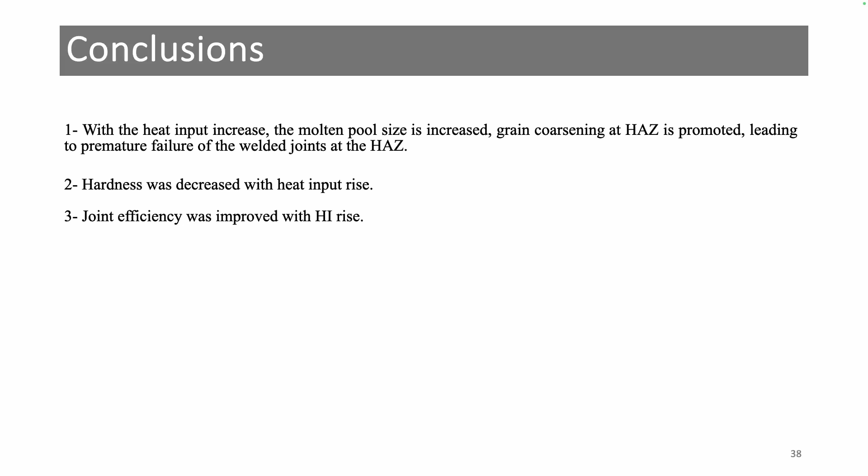Okay, thank you. So we can proceed with your next presentation about indentation behavior of additively manufactured stainless steel welded by tungsten inert gas and laser welding techniques.

Thank you for this introduction. In fact, this work was performed recently. Here we are investigating the TIG welding and laser welding of additively manufactured 316 stainless steel. But what is new for this work? Because already we have many studies on the welding of 316 stainless steel, but it was the orientation of the building itself.

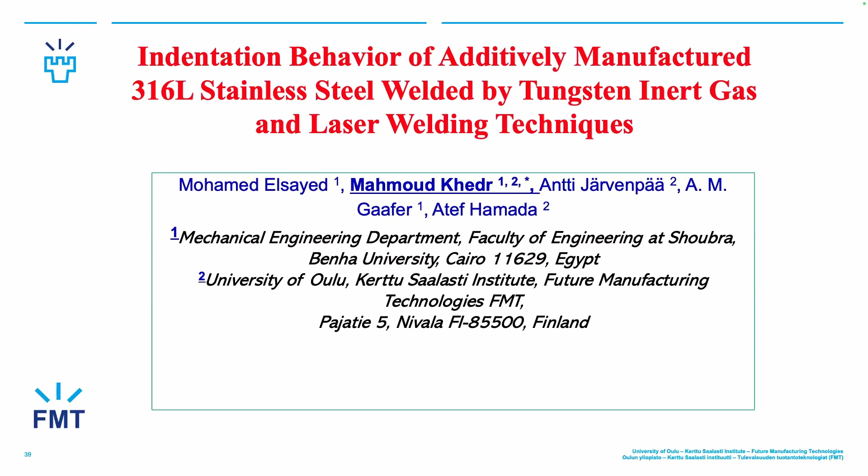So the motivation for that work is that additive manufacturing is already expanding during the past time. And for 316 stainless steel, it's a good corrosion resistant steel with superior mechanical properties with a variety of industrial applications. Therefore, we are investigating 316 stainless steel, and the same also for laser and TIG.

They are widely used and suitable for additive manufacturing, because we know that there are some dimension limitations for additive manufacturing. We are using laser powder bed fusion. Therefore, for the assembly, it would be better to recommend which technique to weld these base metals.

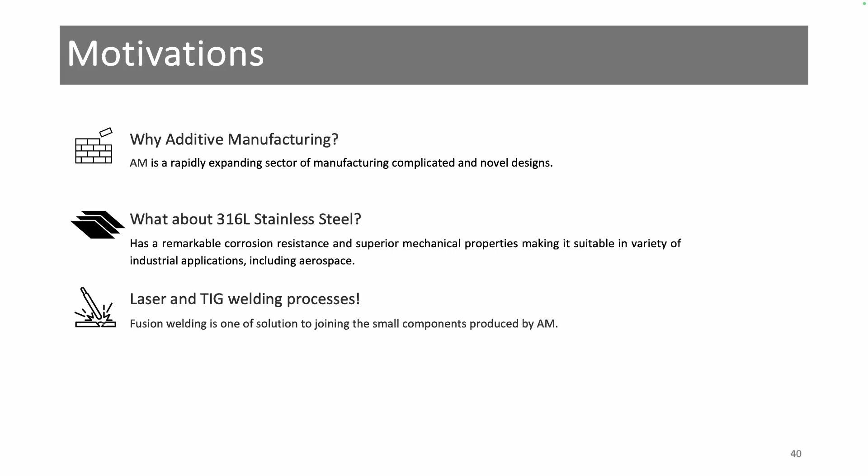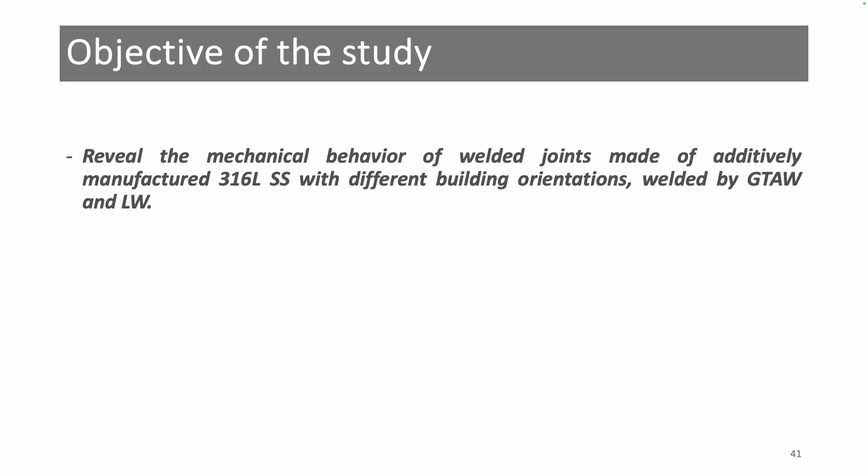So the objective of the study is to reveal the mechanical behavior of weld joints made of additively manufactured 316 steel with different building orientations, welded by TIG and laser welding.

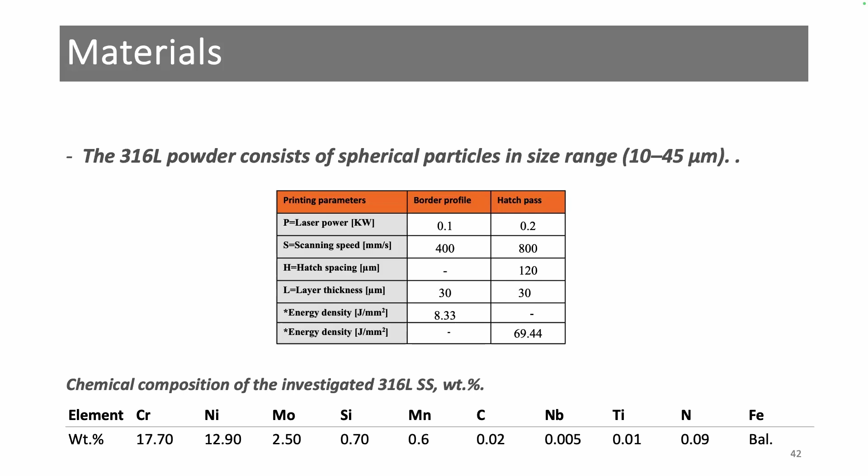The materials: the 316 stainless steel consists of spherical particles with size ranging between 10 and 45 micrometers. We use this printing parameter for the base metals. And here is the chemical composition of the powder.

Regarding the methodology, we performed 3 different printing orientations of the material: 90, 45, and 0 degrees.

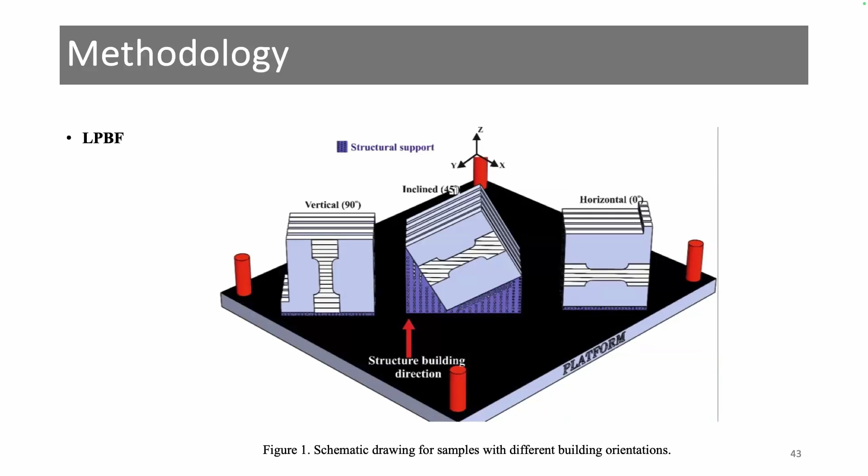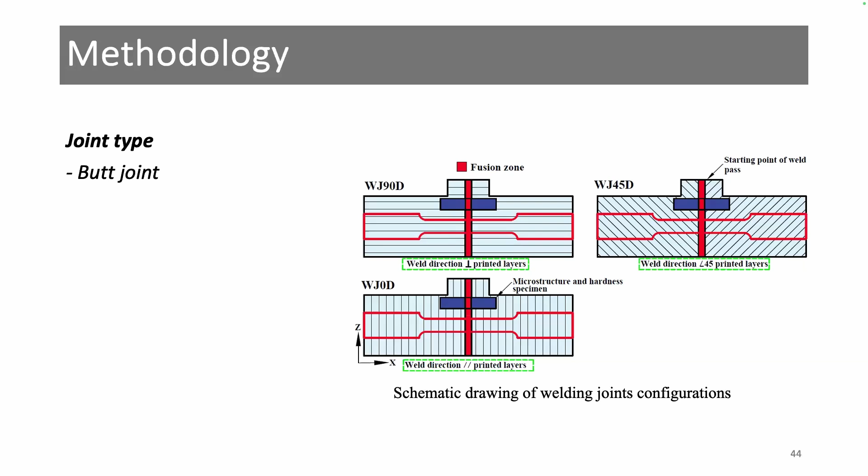The welding methodology implies butt joint. Here is the relationship between the building orientation and the welding. For example, here we defined that this joint is WJ90, meaning the welding direction was perpendicular to the printing. Here, like 0 degree, WJ0 means that the welding direction was parallel to the printed layers. And here we have WJ45 due to the angle of 45 degrees between the welding line and the printing direction.

The TIG welding technique used filler metal 316L to fill the 1 millimeter gap between the base metals, and pure argon was used as the shielding gas.

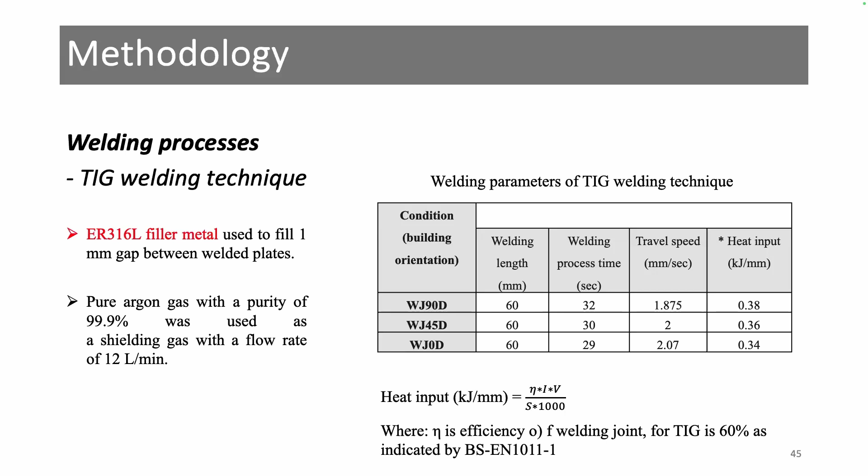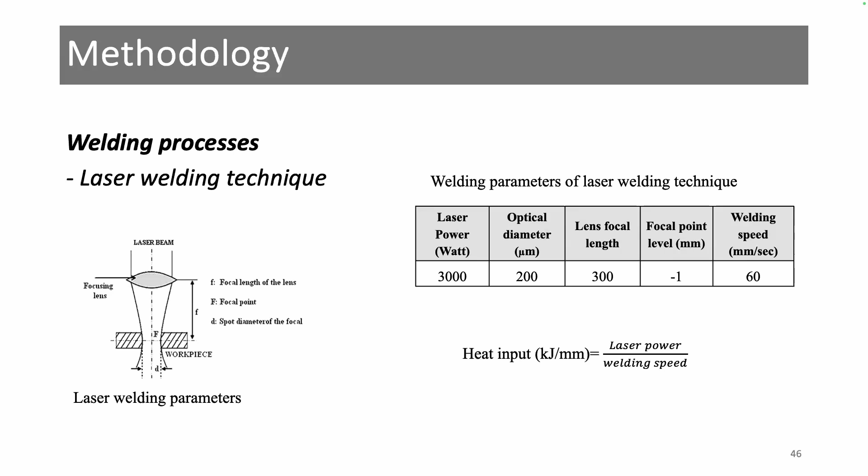And now we go to the results and discussion of this study. Here we show the EBSD of the base metal: this one was in 0 degrees, and here 45.

And here's 90 degrees. We can see that this line here, the dashed yellow line, represents the printing layer boundary. And here we can find that the propagation or formation of the grain boundaries will be parallel to the printing direction, or perpendicular to the printed layer.

While here in the 45 degree, we can see that the grain boundaries are extended with the angle of 45. And here for the 0 degree, we can see the extension of the grain boundary in the same direction as the printing direction.

And here, this is the IPF of the base metal. You can find that there is some preferred orientation for the 0 degree in 001 and 101, while in the 90 degree there are some preferred orientations for 111 and 001. And for the 45, there are median orientations between the 0 and 90.

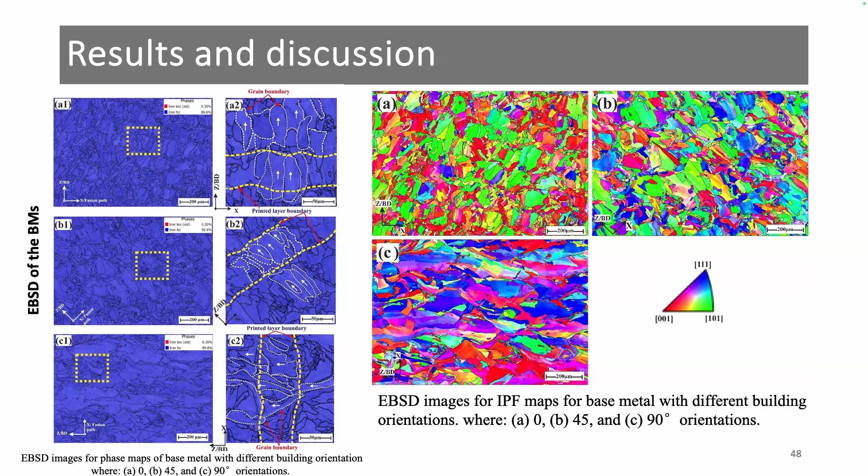Here we compare the values of strength and ductility of the printed base metals with the literature. For this, we find that the strengths of 0 and 45 were greater than the 90 degree specimen printed with 90 degree orientation, and this is in agreement with the literature.

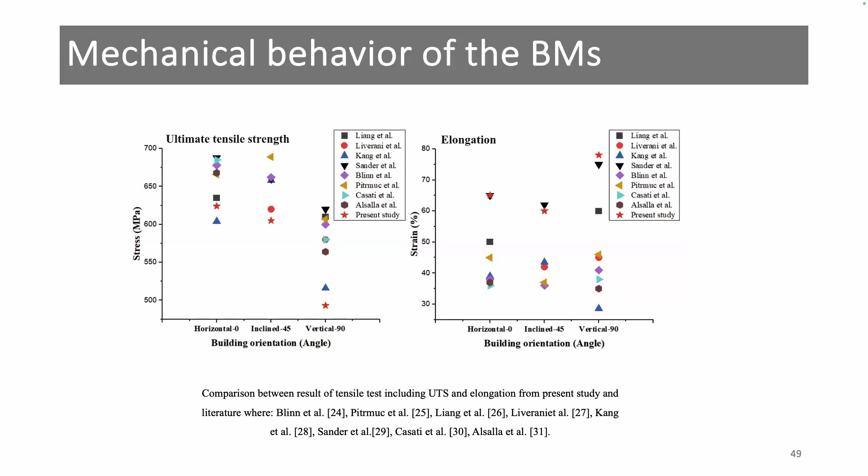While here in the elongation percentage, we find that the 90 degree orientation gives the maximum elongation percentage, or ductility.

We start with laser welding results. Here we just remind you again that WJ90 is the welding direction perpendicular to the printed layer. For WJ0, the welding direction is parallel to the printed layer.

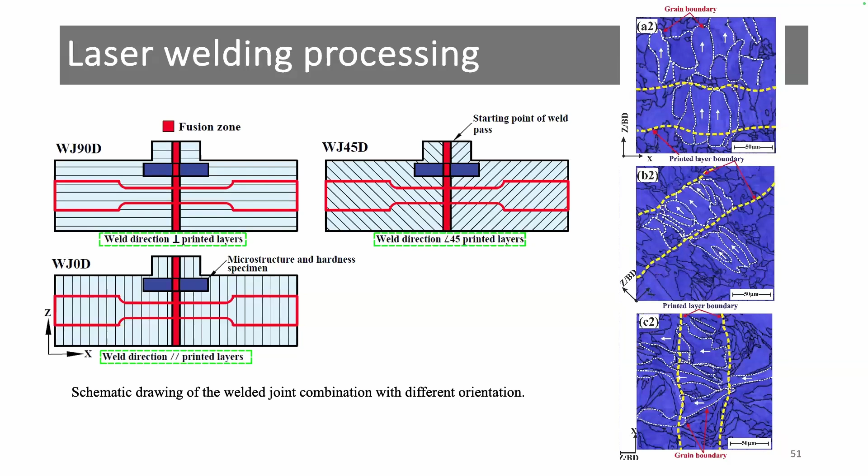Here, the optical microstructure by laser microscope of the fusion zone, and here is part of the base metal. So when we look here at the base metal, we will find that the cellular structure nearly disappeared after the heat treatment.

We performed heat treatment at 1000 degrees Celsius for 60 minutes to relieve some thermal stresses. However, after the process of laser welding, we will find that the base metal showed that cellular structure again.

And when we zoom in on this area at the interface between the fusion zone and base metal, we will find that the main grain is also extended here between the base metal and the fusion zone of the laser welded joint, and the same also for 45 and 90.

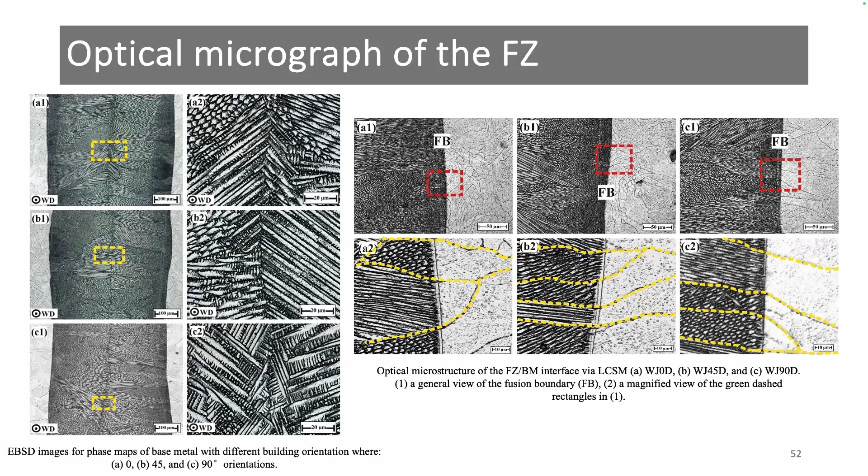So it means that the laser welding does not have an extreme effect on the orientation of the main grain boundaries in the base metal.

And here the phase maps and IPF of the fusion zone. We find that for that angle 0, the fusion zone width is about 0.55. Then this width was decreased for the 90 degrees.

In fact, the main reason here is that these grain boundaries are perpendicular to the welding pass, and then the heat flow or cooling rate here will be much slower than this one. Also, you can see that the size of the grains in the fusion zone are much greater than the size of the grains in the 90 degree. The main reason is the orientation of the grain, which affected the cooling rate after welding.

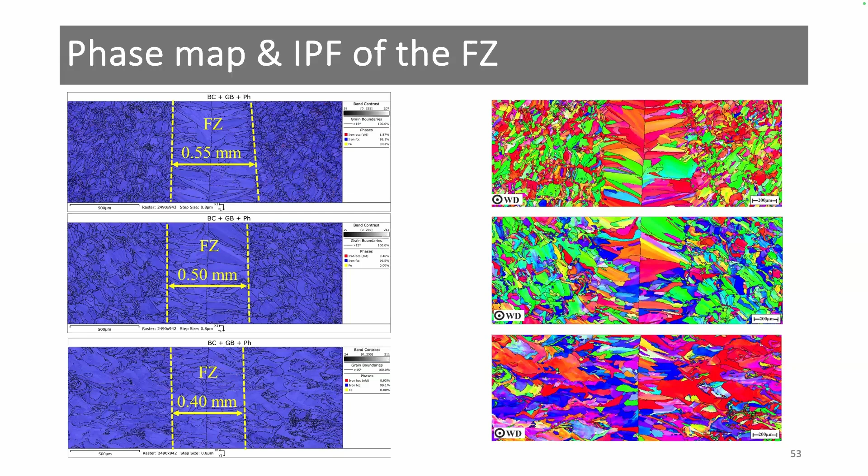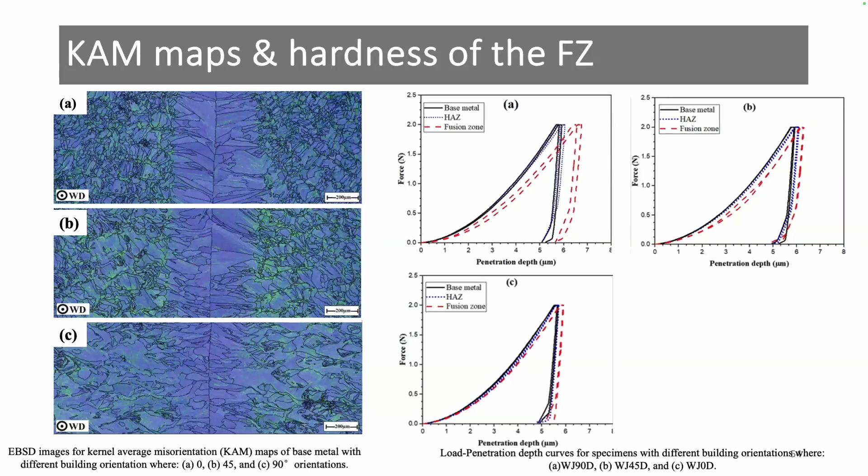Regarding the tensile behavior, we find that the vertical one here is the WJ0D, with the weld joint in parallel direction showing a very similar stress-strain curve as the base metal. However, here in the 90 and 45 degree, there was a reduction in strength and ductility.

When we compare the fracture location of the weld joints, we find that for the 90 and 45 degree, the fracture happened at the fusion zone, meaning there was some softening here compared to the base metal. While in the 0 degree, the fracture happened outside the fusion zone, in the base metal. This is normal given the very similar behavior in the stress-strain curve.

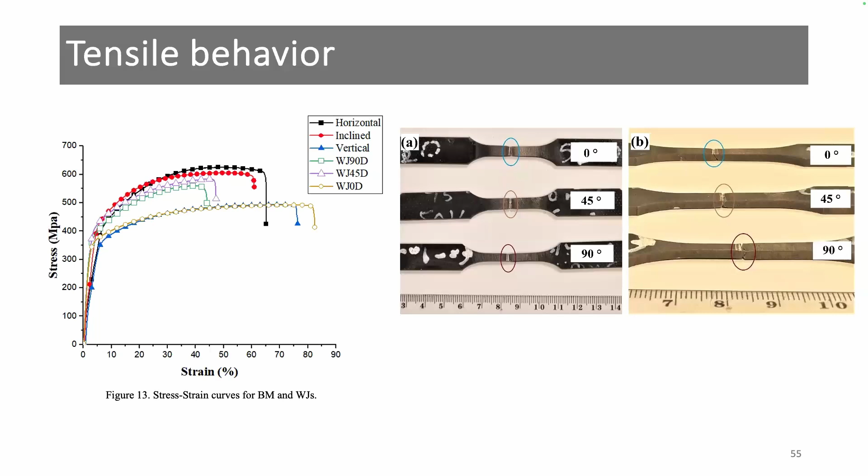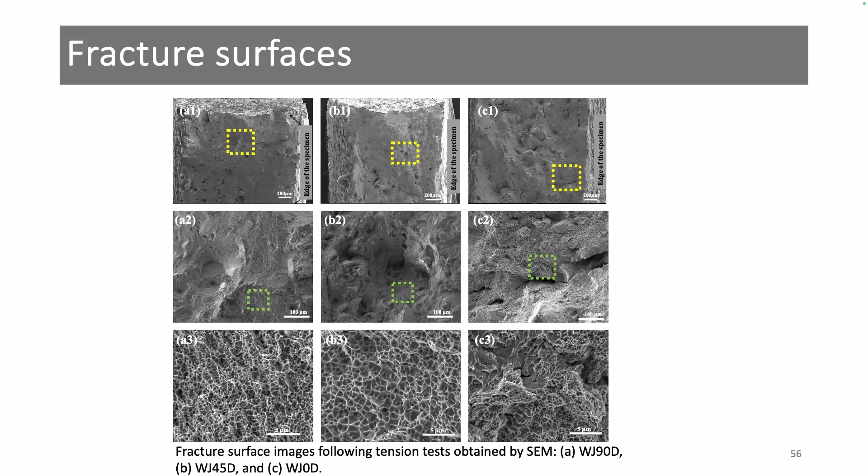Regarding the fracture surface study, we found that most of the specimens also have this type of ductile fracture. This was laser welding. Here is still some analysis of the mechanical and microstructure behavior during the tensile testing. We are still figuring out why this fusion zone and the 0 degree give this amount of deformation more than that of 90 and 45 degrees.

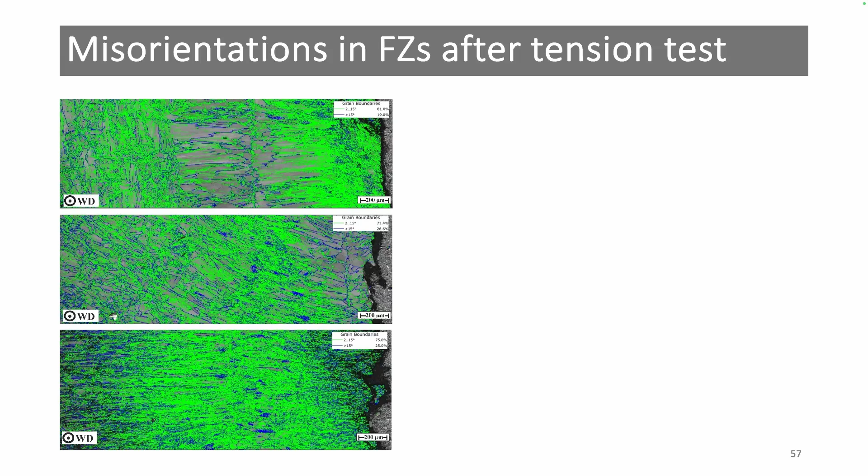When we compare the size of the fusion zone, we find that in the 90 degree, the width is about 6 millimeters, while in the 0 degree it was about 4 millimeters. The size of the grains in the 90 degree was also greater than that for the 0 degree. This means there is agreement between the cooling rate in TIG and laser welding joints.

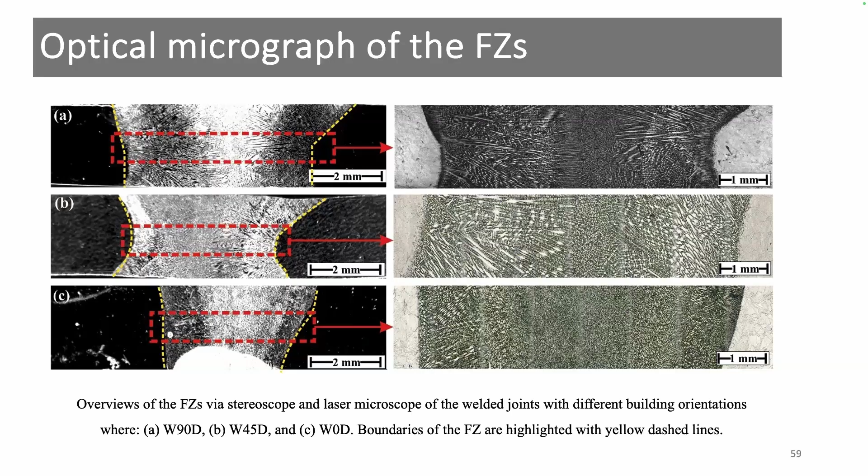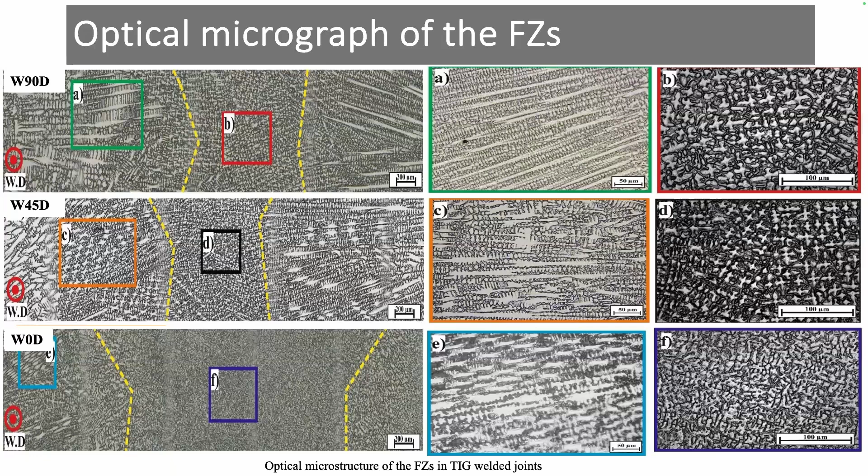Here we made some zoom on this structure at the fusion zone for the 90 degree. We find that the size of the dendrite arms are greater than that for the 0 degree, and the main reason is also cooling rate.

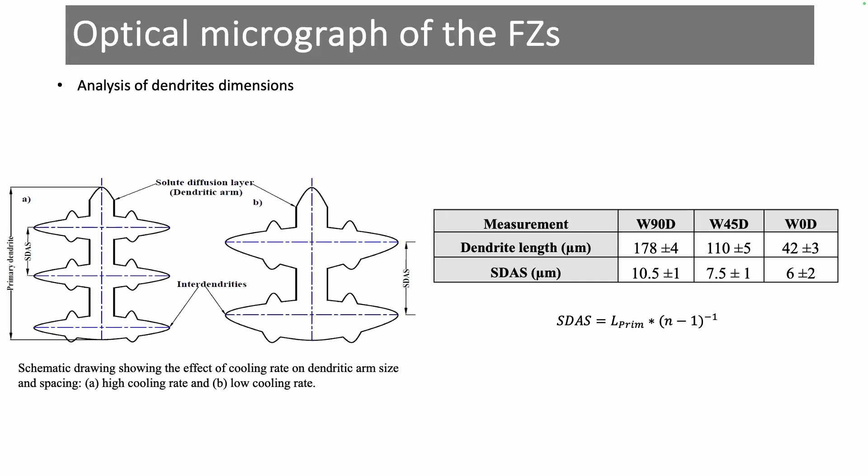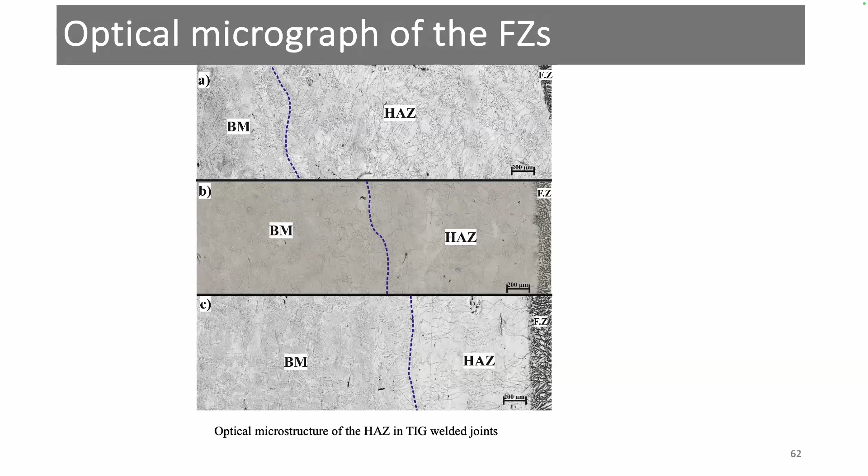This is statistics for the size of these dendrite arms in the WJ90D and WJ0D. Also, the heat affected zone was having different widths in the 90 degree, and its size was greater than the counterparts in 45 and 0 degrees, meaning that the cooling rate here was lower, and the material shows greater heat affected zone widths.

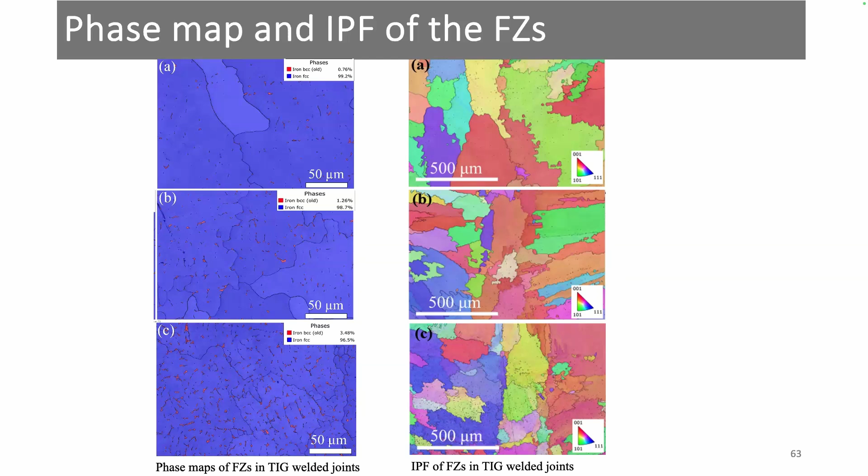In addition, there is a more important thing, which is the amount of delta ferrite. The amount of delta ferrite increases with increasing cooling rate, meaning that this structure already has a higher cooling rate. We also made confirmation about this delta ferrite using X-ray diffraction. We found one peak in the 0 degree which was not found in the 45 and 90 degree, in addition to using a ferrite scope to measure the volume fraction of the delta ferrite.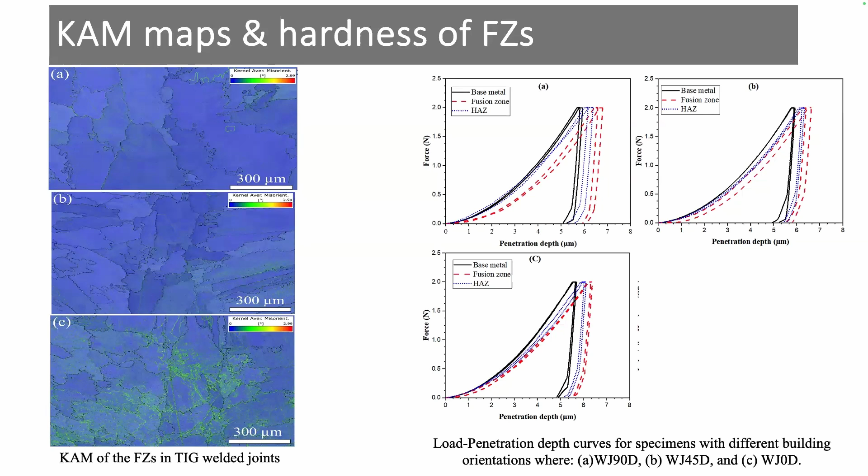Okay, we still have time to see. Here are the values of the hardness, representing that WJ90D was also having lower hardness values than WJ0D.

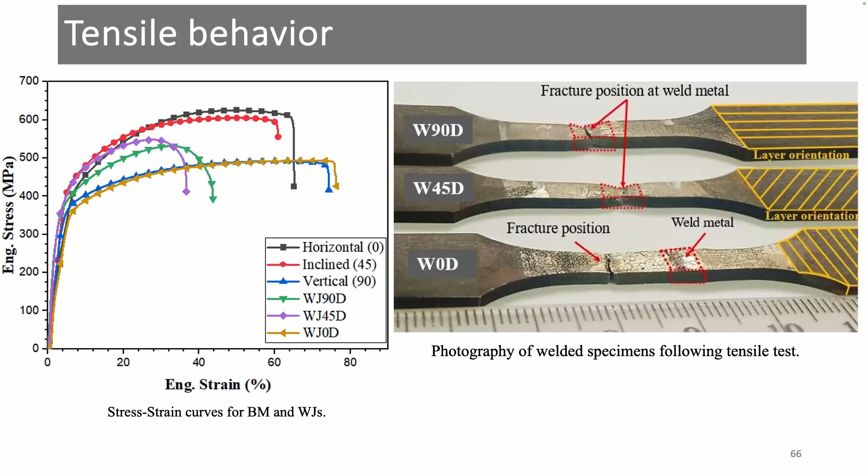For the tensile behavior, we also got similar behavior for WJ0D, and the fracture already happened outside the weld metal, while in WJ90 and WJ45 it happens again at the fusion zone. Also, the fracture surface displayed this type of ductile features.

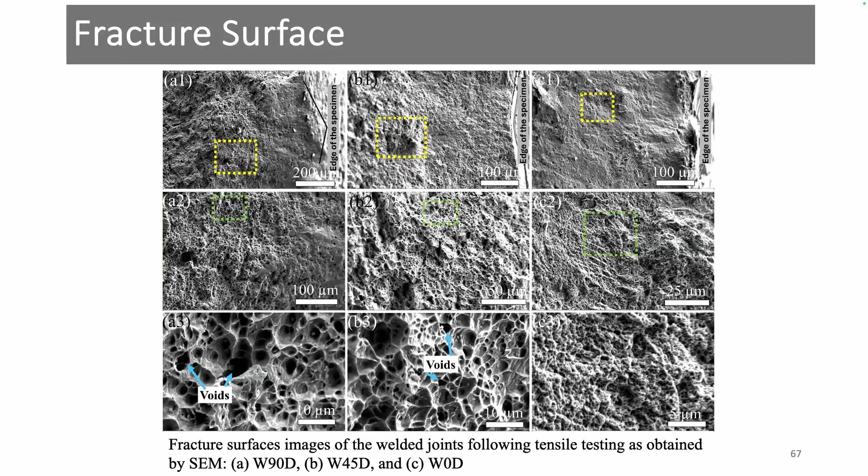However, in the WJ90 and WJ45, it displayed some voids in the fracture surface, and we attributed the presence of these voids to a deficiency in the volume fraction of delta ferrite.